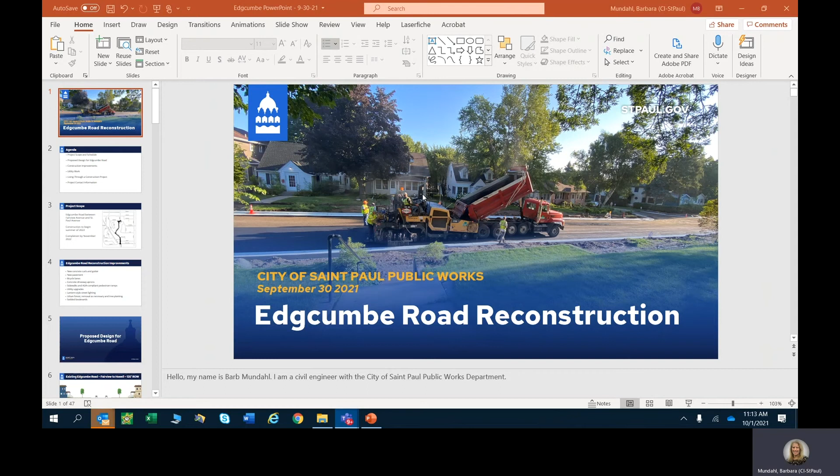I will be the manager of the Edgcumbe Road reconstruction project scheduled for 2022.

This presentation will cover the project scope and schedule, proposed design for Edgcumbe Road, construction improvements, utility work, and a little bit about what it's like living through a construction project.

The scope is reconstruction on Edgecumbe Road between Fairview Avenue and St. Paul Avenue. We plan to begin construction the summer of 2022 and have it completed by November of 2022.

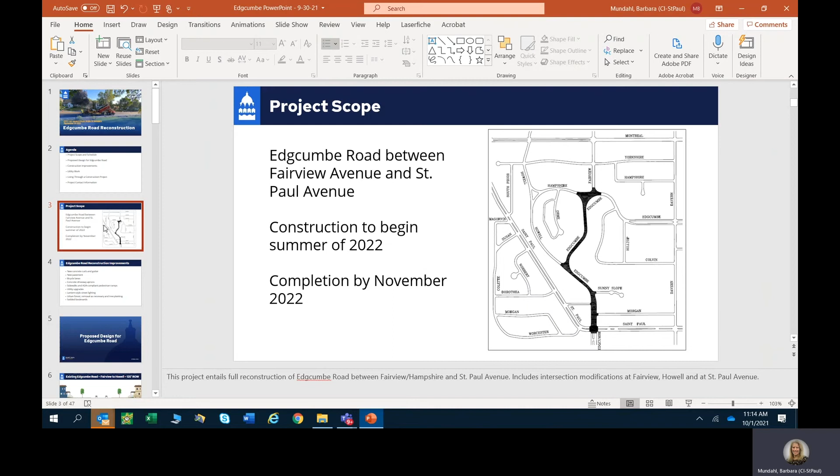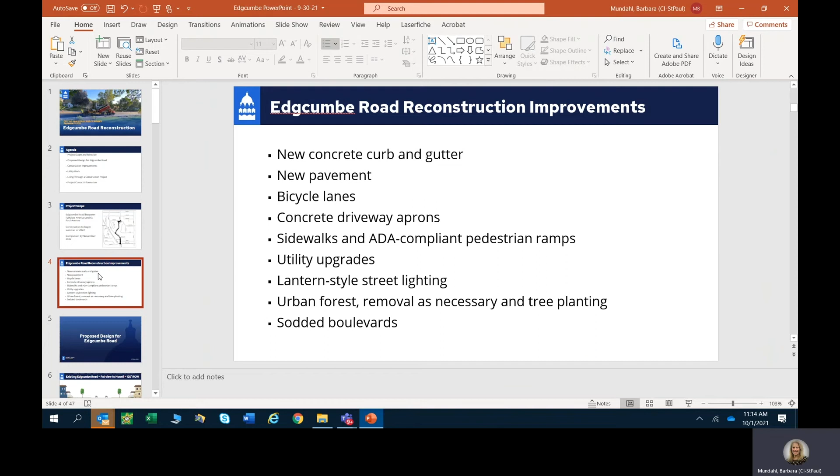Some of the improvements included with the project are new concrete curb and gutter, new pavement, bicycle lanes, sidewalks, utility upgrades, and lantern style street lighting.

I will be addressing the proposed design in 3 separate segments, but overall we are proposing to narrow Edgcumbe Road and to convert the shoulders to bicycle lanes.

Segment 1 is between Fairview and Howell. This segment of Edgcumbe Road is 44 feet wide in a 120-foot right-of-way. It consists of one wide vehicle lane in each direction and 8-foot wide shoulders.

The proposal is to narrow the roadway down from 44 feet to 36 feet wide. It still provides enough room for a vehicle lane in each direction and one bicycle lane in each direction.

The proposal is to leave the east curb line relatively in the same location and add the additional 8 feet to the west side, providing a flat area to install sidewalks and a 10-foot boulevard.

We will not be proposing sidewalks on the east side because of the steep slopes and vegetation that exists there today.

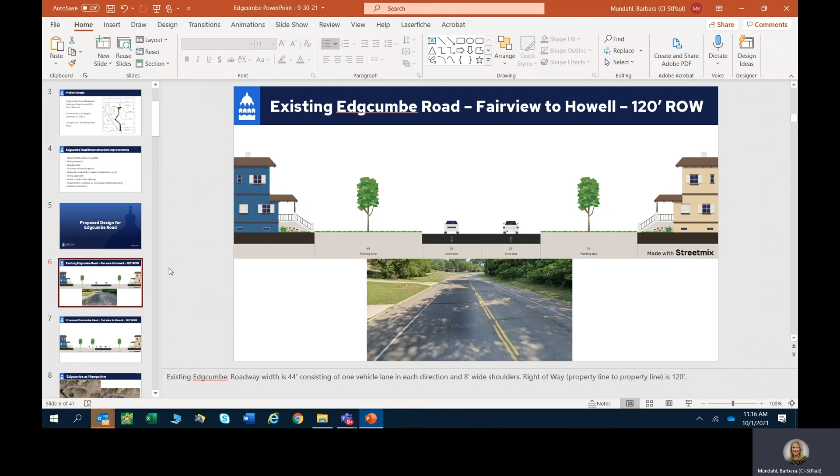The project does include modifications of the intersection of Hampshire and Edgcumbe Road. There are 2 alternatives proposed for the intersection of Edgcumbe and Hampshire. One is to leave it essentially the way it is, with this additional roadway on the southwest side.

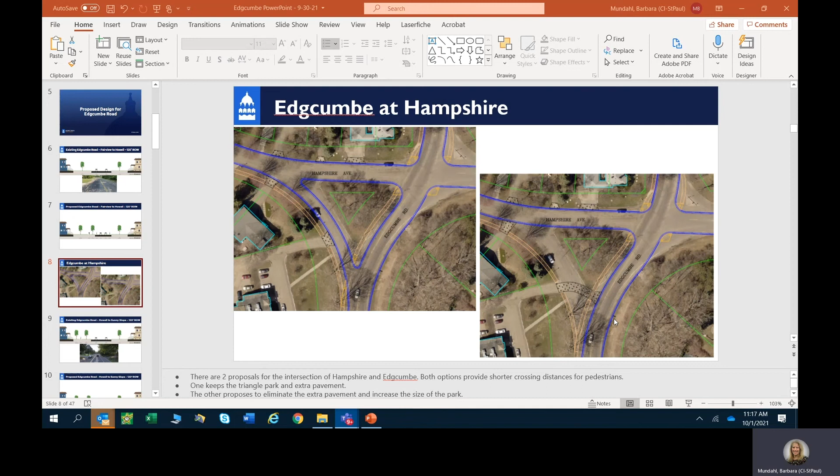The other alternative is to remove that roadway and make this park adjacent to the existing sidewalk. That would require reconfiguring the existing driveways. Both alternatives tighten up the intersection to provide a shorter crossing distance for pedestrians.

The second segment is from Howell to Sunny Slope. Again, the roadway is about 44 feet wide. There are sidewalks on the southwest side of the roadway.

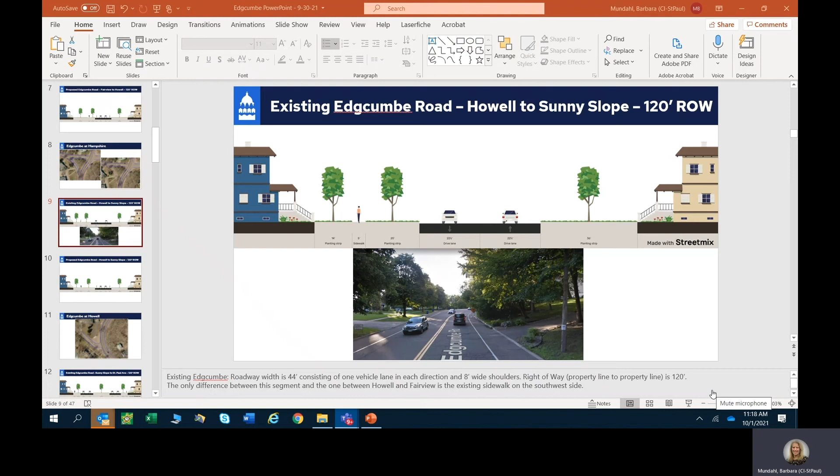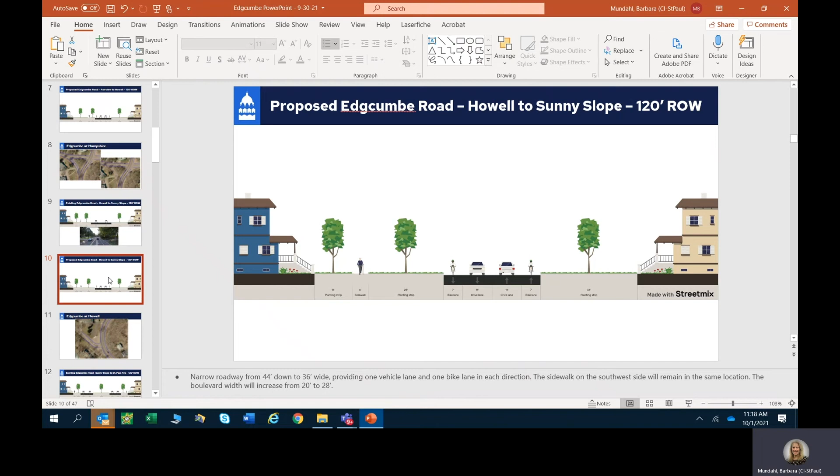We are proposing to replace those sidewalks in essentially the same location and again narrow the roadway down to 36 feet wide to provide a vehicle lane and a bike lane in each direction.

Again, we would like to tighten up the intersection of Howell and Edgcumbe to provide a shorter crossing distance for pedestrians and to create more of a traditional T intersection.

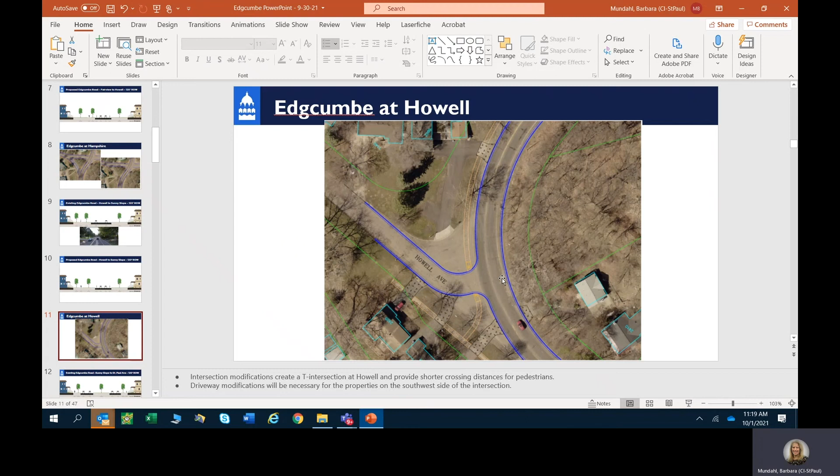The third segment is Edgcumbe Road between Sunny Slope and St. Paul Avenue. The existing cross section here has 2 lanes of vehicle traffic in each direction, no bike lanes, sidewalk on both sides from St. Paul to Morgan, and then no sidewalk on the east side between Morgan and Sunny Slope.

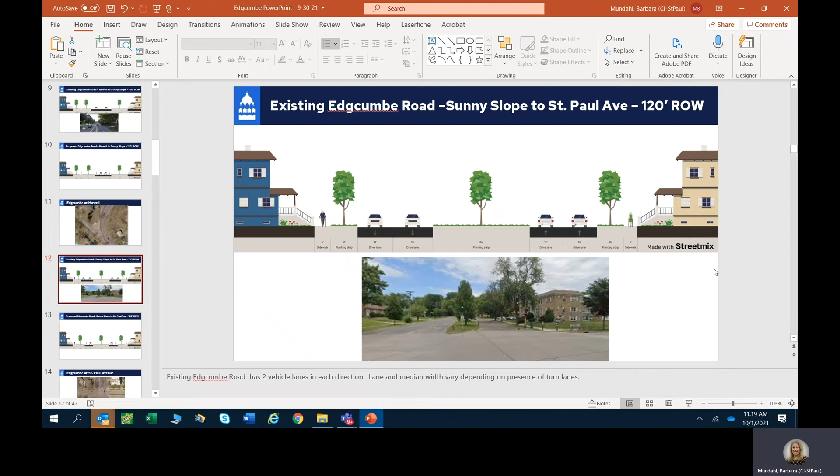The proposal for this segment is to eliminate one vehicle lane in each direction and add bicycle lanes. Sidewalk is to be added on both sides of the street.

The portion between Morgan and Sunny Slope on the east side, where no sidewalk exists today, is proposed to have sidewalk added.

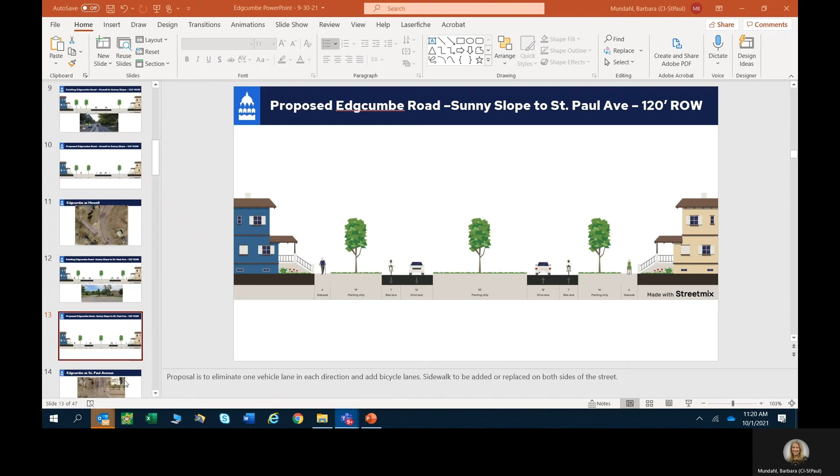The project does include the intersection of St. Paul Avenue and Edgcumbe Road. We will be adding bump outs at the intersection to, again, decrease the crossing distance for pedestrians. We will also be revising the traffic signal system here.

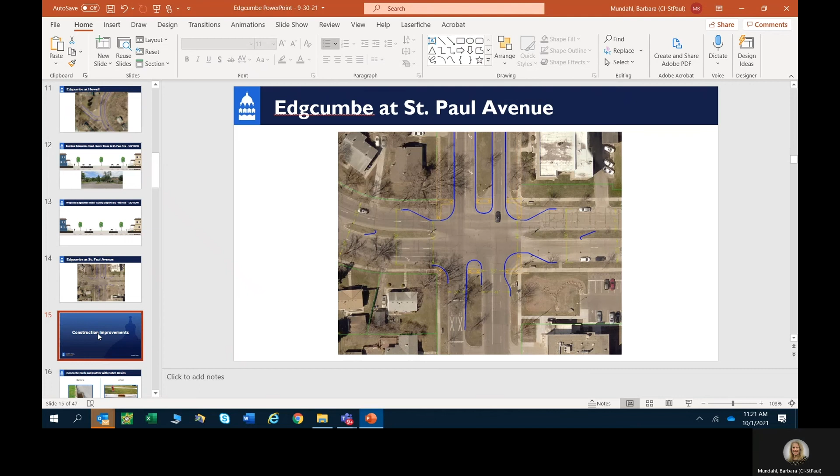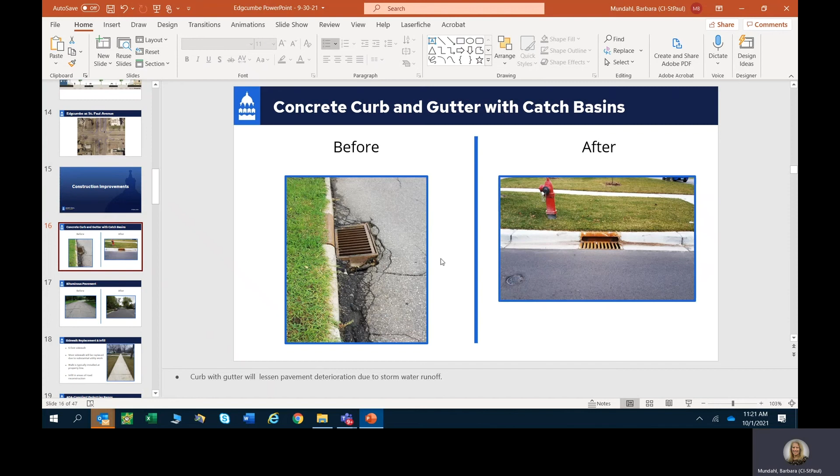Briefly covering the proposed construction improvements: we will be replacing the existing straight concrete curb with concrete curb and gutter, and replacing all of the drainage structures.

We will be replacing the pavement, obviously. And again, we will replace the existing sidewalk with a 6-foot sidewalk.

Typically sidewalk is installed at the property line. In the case of Edgcumbe Road, we will be placing the sidewalk where it currently is. New sidewalk will be placed such that it will minimize the impact to existing trees and minimize the amount of grading required.

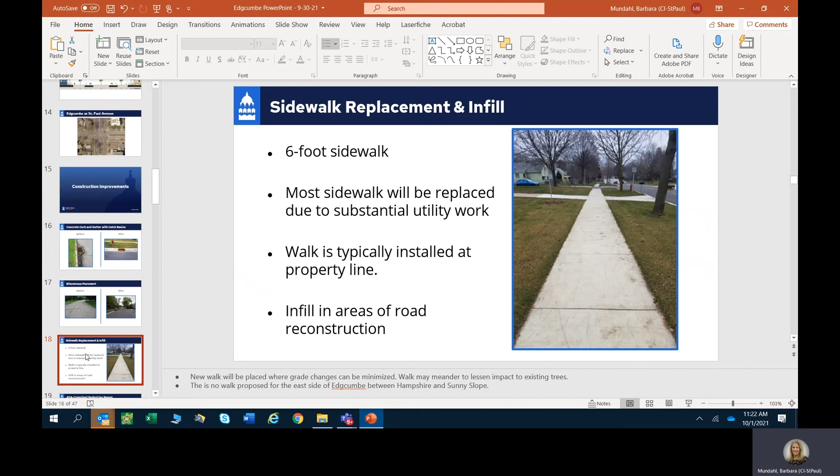Each corner will have ADA compliant pedestrian ramps.

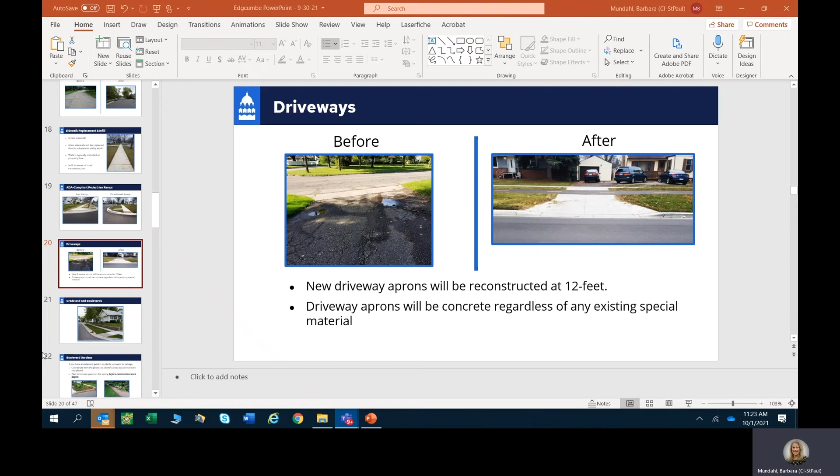We will be replacing the driveway aprons with concrete, regardless of what materials they are today. So if you have an asphalt driveway, a concrete driveway, or brick or other specialty material, the apron will be replaced with concrete.

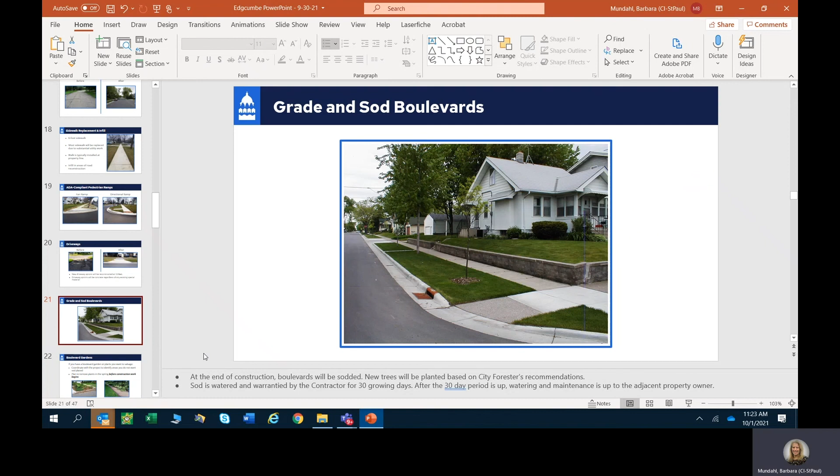After the initial layer of asphalt, they will come in and put in new topsoil in the boulevards, plant trees, and place sod. Boulevard gardens and irrigation systems will need to be removed from the city right of way prior to construction.

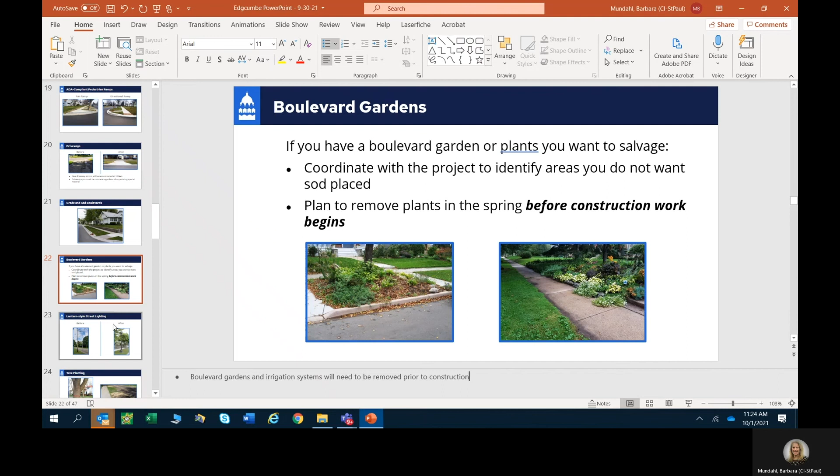We will be installing LED lantern style street lighting, and the wood pole lightings will be removed.

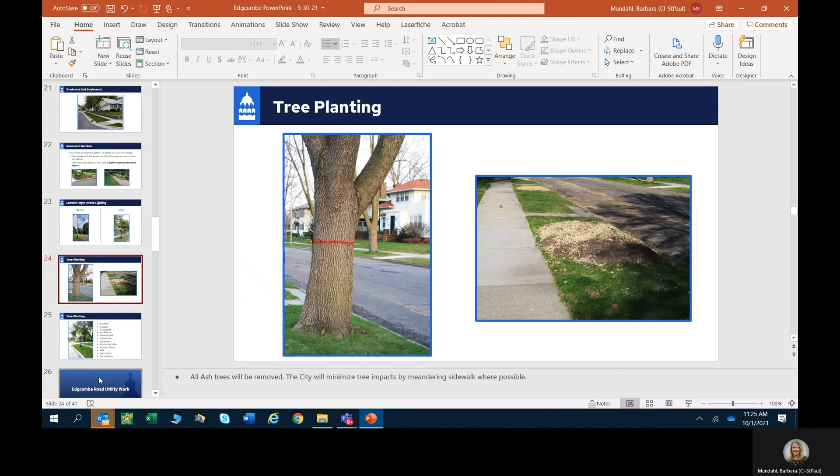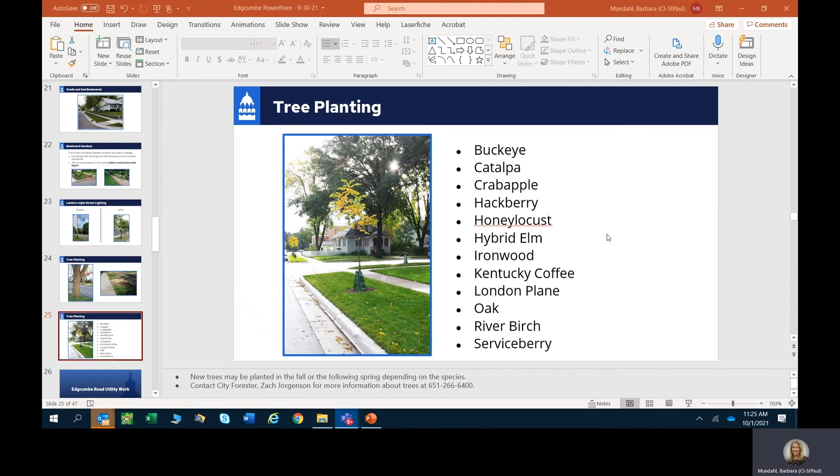Most of the ash trees on Edgecumbe Road have already been removed. They will be replaced. New trees may be planted in the fall or the following spring, depending on the species of trees.

There's a lot of work that has to happen below ground before the surface elements can be constructed. Utilities such as water, gas, sewer, and communication lines are often upgraded with these projects.

The Edgecumbe Road project will replace about 3,000 feet of water main. The existing water main is a 12-inch cast iron installed in 1930. That water main will be replaced by an 8-inch ductile iron pipe.

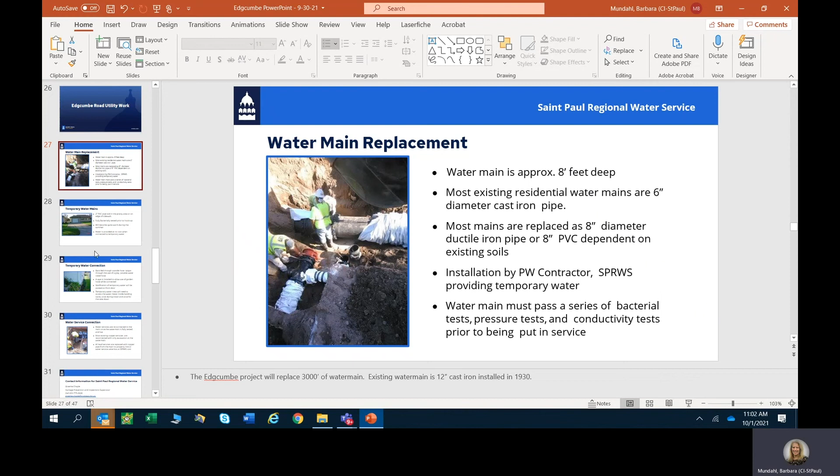Before disturbing the existing water main, St. Paul Regional Water Service will install a temporary main. These are the yellow pipes that you'll see on the surface prior to construction.

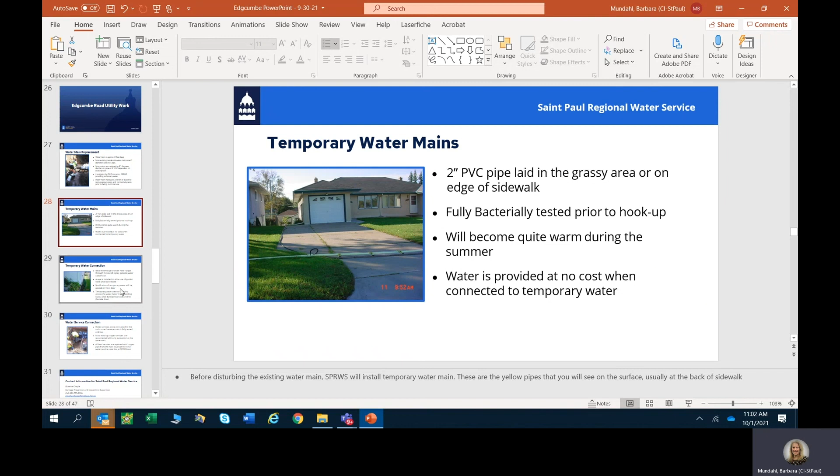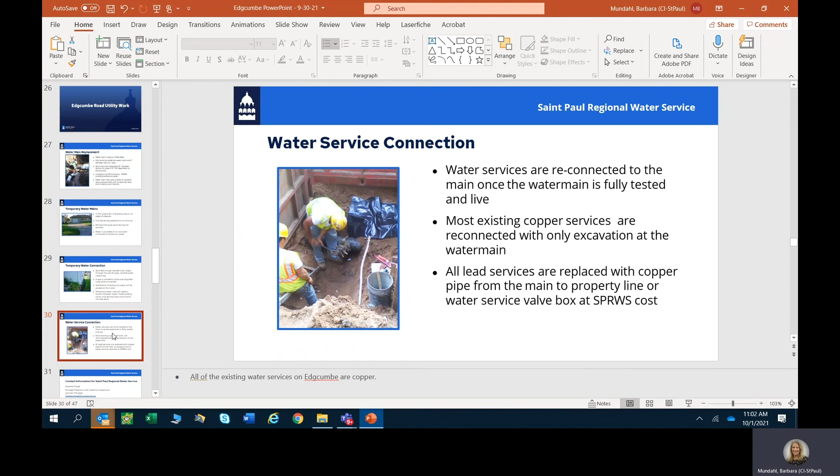St. Paul Regional Water will need to connect your water service to the temporary main. This will require access to your building. All of the existing water services on Edgecumbe Road are copper, so there will not be a need for lead service replacement.

For more information about St. Paul Regional Water, please contact Graham Chapel.

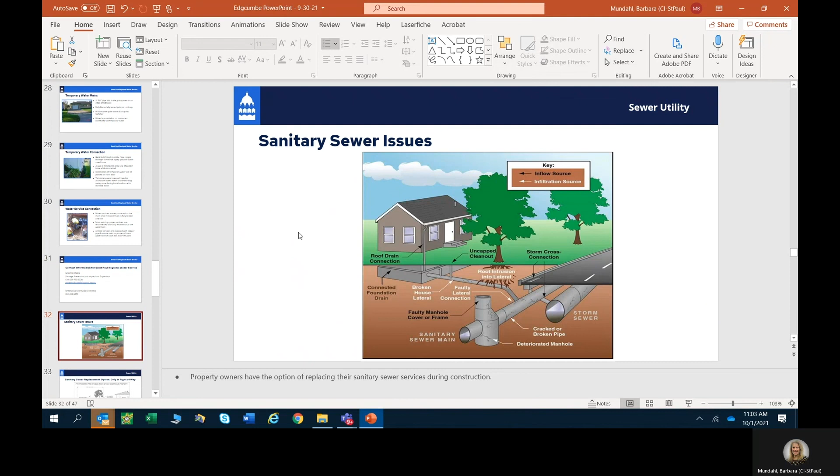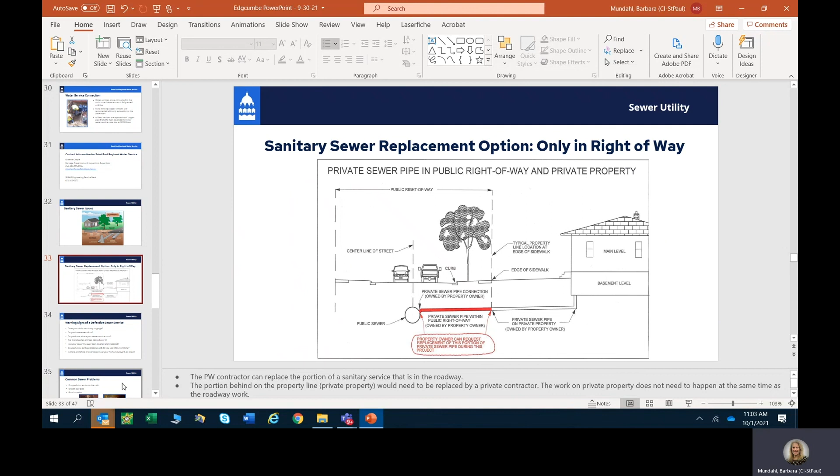Property owners have the option to replace their sanitary sewer service during construction. The public works contractor can replace the portion of the sanitary service that is under the roadway. The portion behind the property line would need to be replaced by a private contractor. The work on private property does not need to happen at the same time the roadway work is happening. You can hire a private contractor after the work is finished.

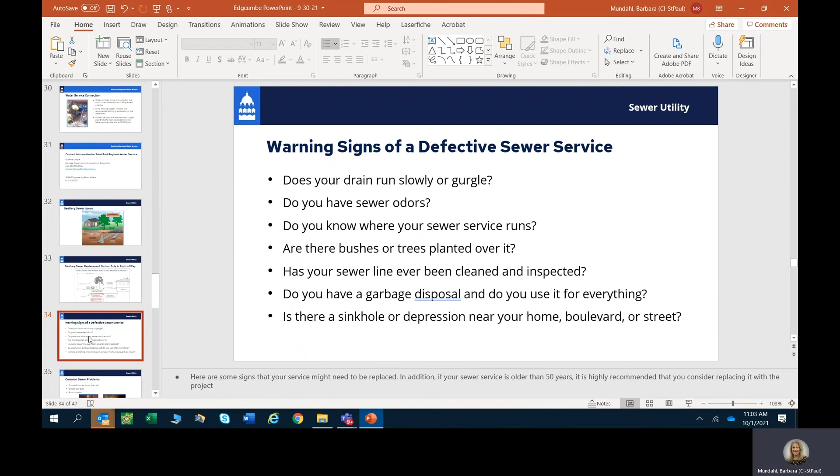Here are some signs that your service might need to be replaced. In addition, if your sewer service is older than 50 years, it's highly recommended that you consider replacing it as part of the project.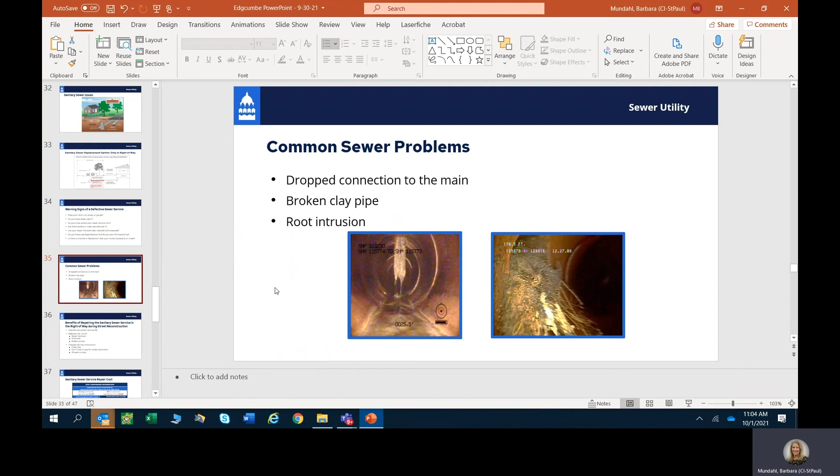The primary reason to replace your sewer service as part of the construction project is it's much cheaper during construction. Everyone pays a fixed rate for the sewer service replacement. You don't have to pay for street restoration, and you can put it on an assessment and pay it over 20 years.

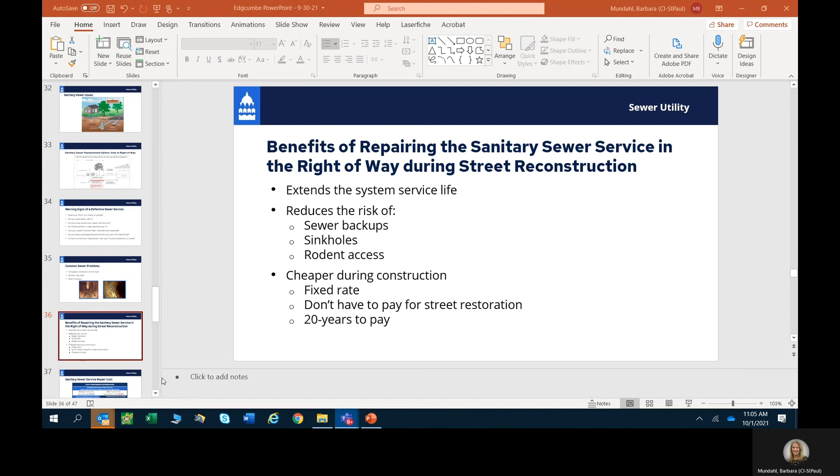This is just an example of the cost savings of replacing your sewer service during construction versus after the construction is completed.

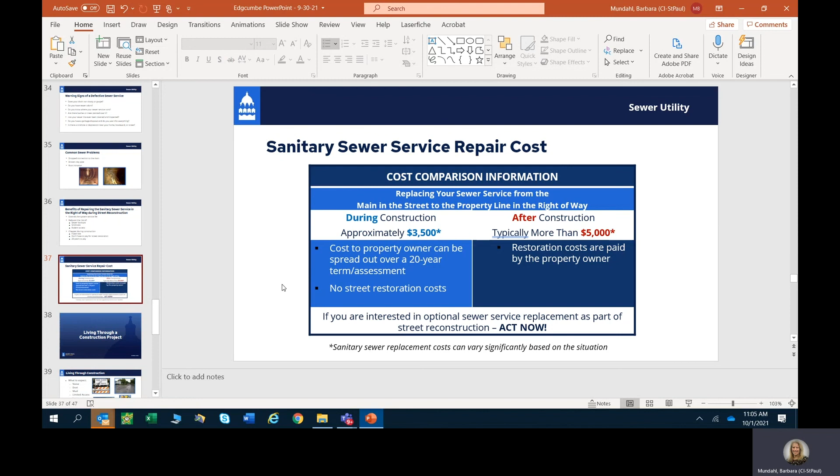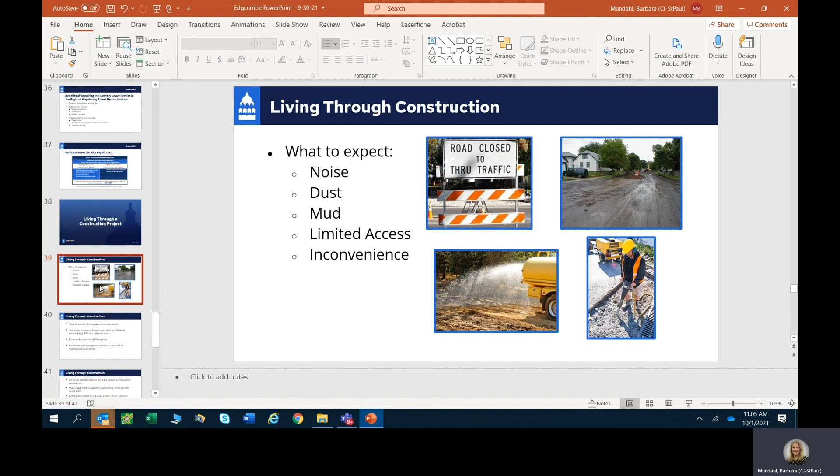So now we'll briefly cover living through a construction project. What to expect: there will be noise, dust, mud if it's rainy, limited access, and inconvenience.

Your street will be dug up numerous times by different crews. Plan on about 4 to 5 months of disruption. This doesn't mean disruption in front of your home, but 4 to 5 months overall to complete the project.

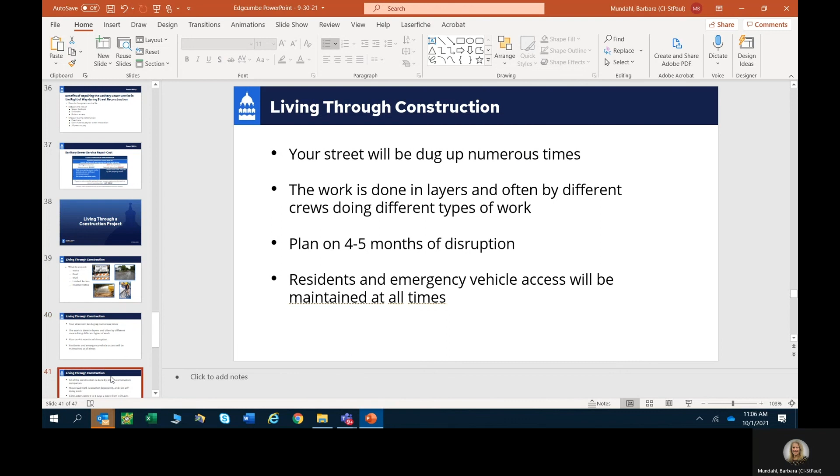We will maintain access for residents and emergency vehicles at all times. All of the work is done by a private construction company.

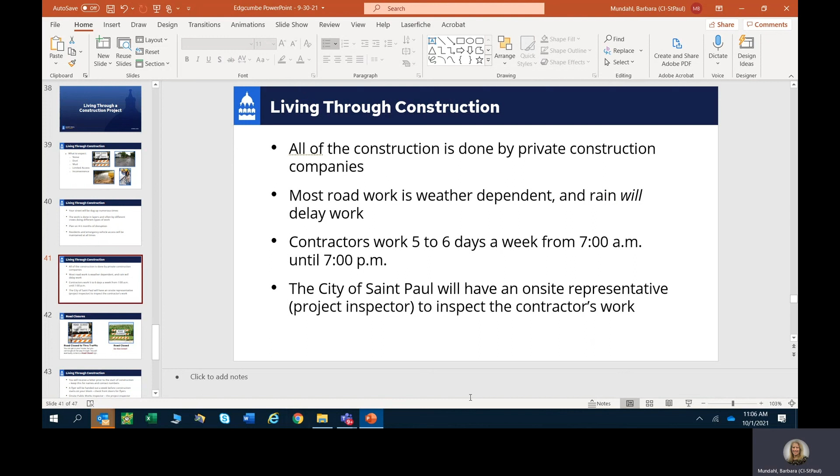The road work is weather dependent. Contractors work from 7 a.m. to 7 p.m., a minimum of 5 days a week. The City of St. Paul will have an on-site representative to inspect the contractor's work.

So the first things you'll see are road closed signs going up. A road closed to through traffic means you can go around those signs and get to your home eventually, but you will not be able to get through.

Eventually, you will come to a road closed sign. When you see a road closed sign, do not enter. There's active work going on, or possibly a gaping hole where they're doing a utility trench.

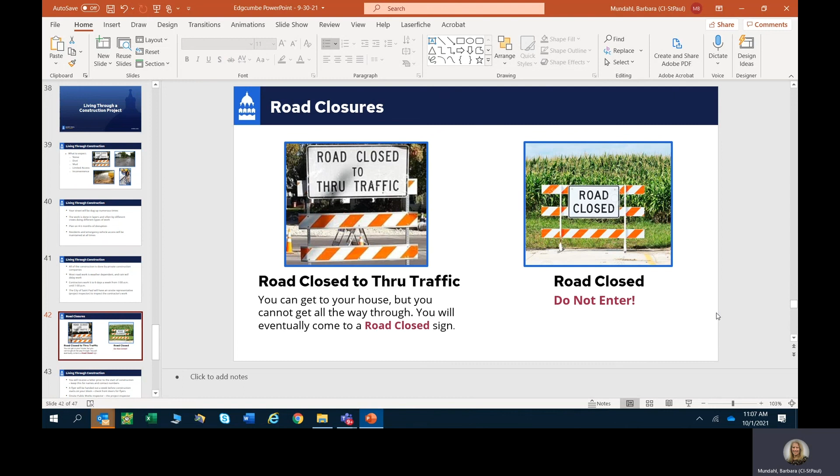You will receive a letter in the mail prior to the start of construction. This will have contact names and numbers.

About a week before construction starts, there will be a flyer that will be posted on your front door, letting you know work is starting, along with a tentative schedule and our project inspector's contact information.

If you have a question or concern, calling the Public Works inspector should be your first call. They are on site, they can give you a more immediate response. If you cannot get a hold of the Public Works inspector, please feel free to call me. We will have weekly updates posted on the website.

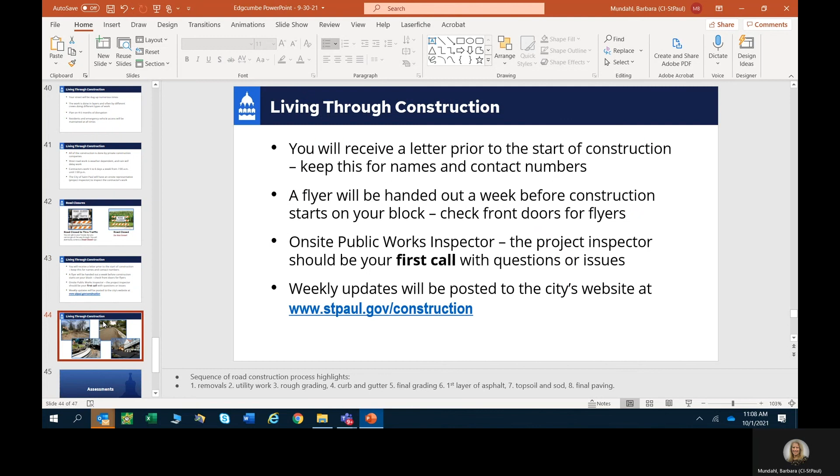Here's a few slides of what to expect during construction. The sequence starts with removals and utility work. Then there'll be some rough grading. Next, they'll start pouring the curb and gutter. Final grading, soil and sod, tree planting and street lighting, and then paving.

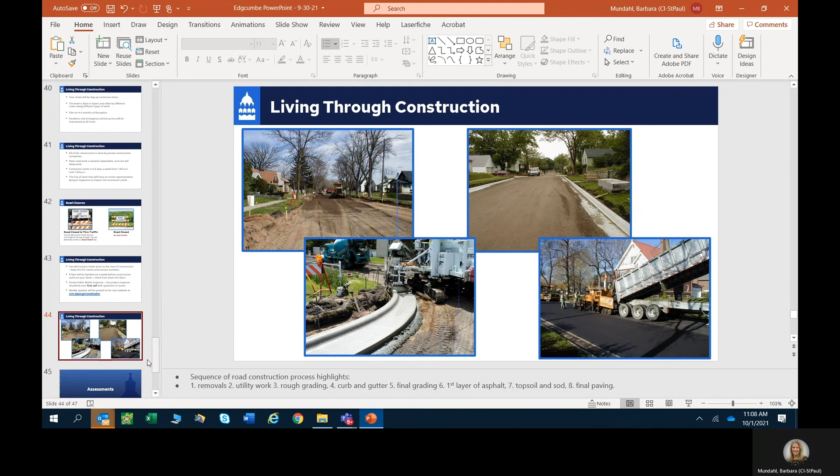We'll briefly cover assessments. There will be an additional PowerPoint with more information about assessments. Street reconstruction projects are funded by city street reconstruction bonds and assessment to property owners. The assessment rate for Edgcumbe Road has not been determined yet, but it will be before the project starts.

Property owners are assessed after the project is completed. There will be, or there could be, a separate assessment if you opt to have your sewer service replaced.

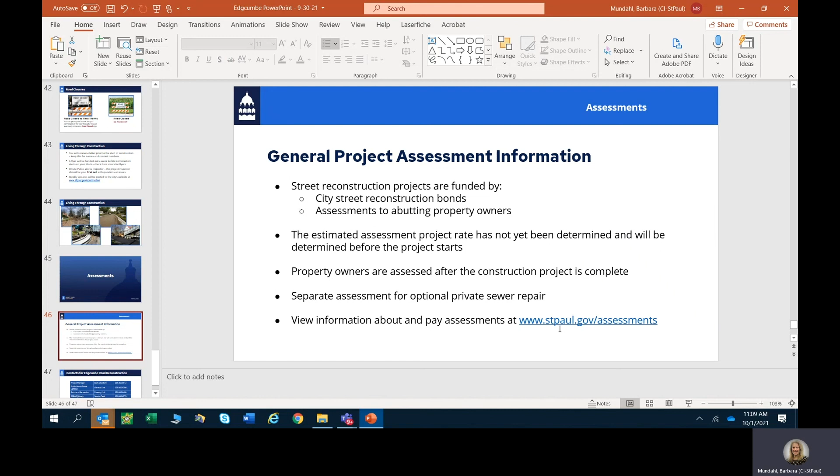For more information about assessments, you can check out the assessment PowerPoint and get information from stpaul.gov/assessments. My name is Barb Mundahl.